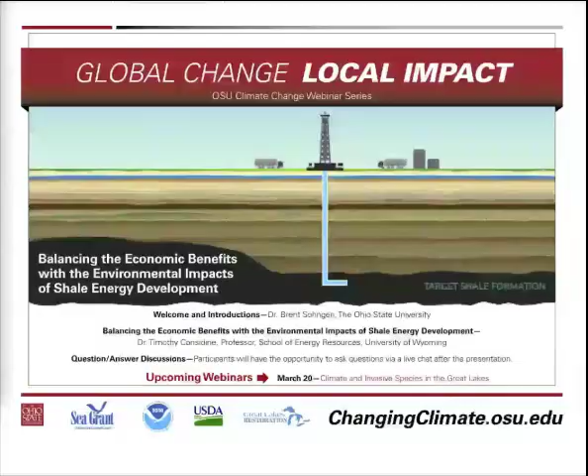So without further ado, let me introduce today's speaker. Dr. Timothy Considine is the School of Energy Resources Professor of Energy Economics at the University of Wyoming and Director of the Center for Energy Economics and Public Policy there. He was previously employed with the Pennsylvania State University, Bank of America, and the Congressional Budget Office. Dr. Considine holds a PhD from Cornell University, an MS from Purdue, and a BA from Loyola University of Chicago. We're delighted to have Dr. Considine with us today to speak about balancing the economic benefits and the environmental impacts of shale energy development. Dr. Considine?

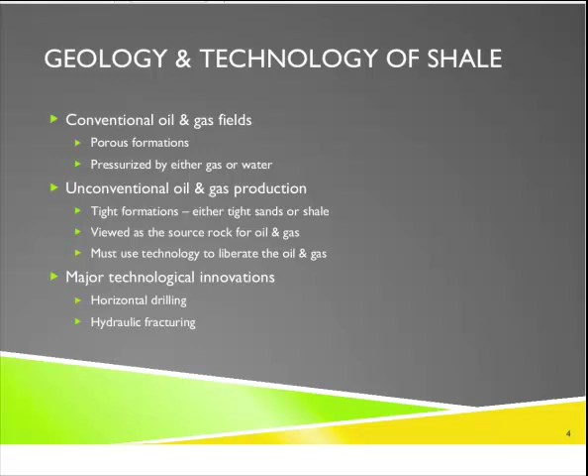So technology is the key here, and there have been a number of technological improvements over the past 10, 15 years that have really gained a foothold since 2004. And there are basically two: horizontal drilling and hydraulic fracturing. On the next slide is an illustration of what these technologies can do. You can see there are two wells.

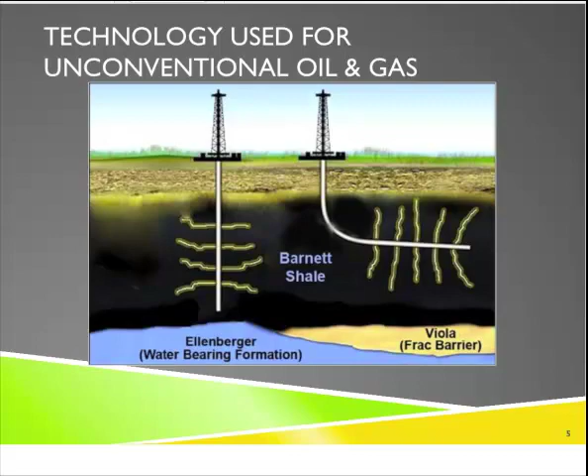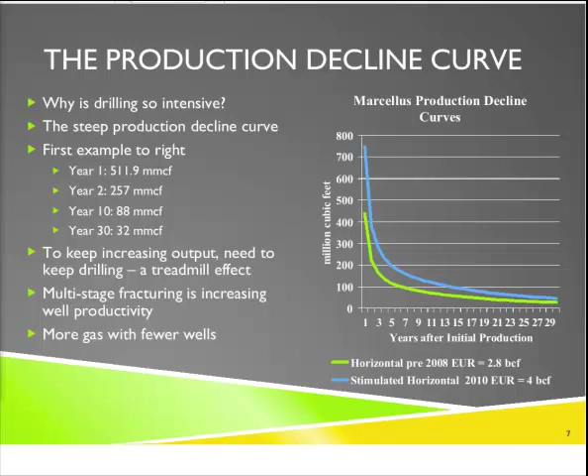So if a company or an industry slows down or reduces drilling, then those production decline curves will eventually catch up with you. Production will peak and start to decline. We're already seeing early evidence of this in the Barnett with the slowdown in drilling there. Okay.

For instance, in northeastern Pennsylvania, there are quite a few wells in that 4.6 BCF range and above. And as you move west and south, the wells get a bit smaller and the reserves aren't quite as large. I assumed 4% of the output is natural gas liquids. That's a critical assumption. That's based on some aggregate data we've collected.

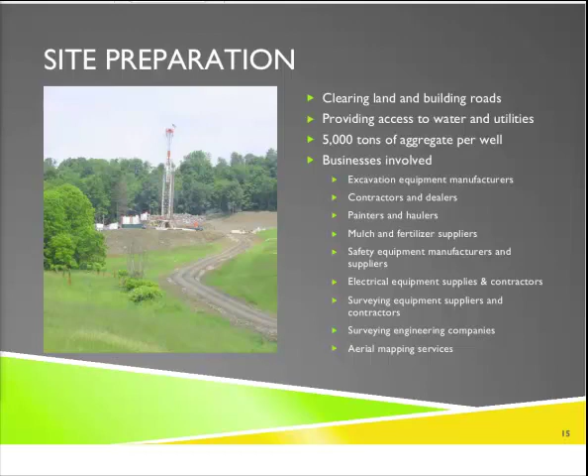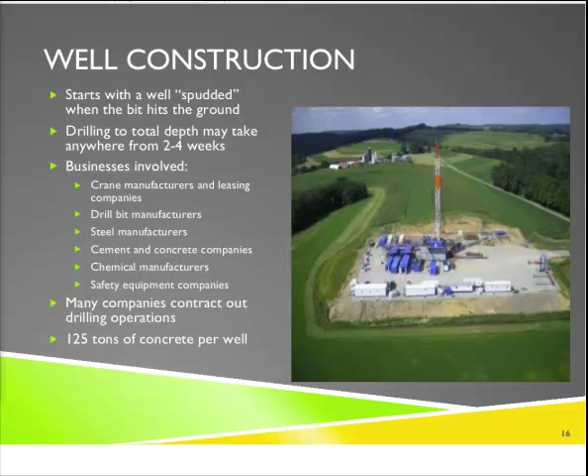Next is well construction, and the term in the industry is when a well is spudded. That's when the drill bit hits the ground, and most statistical agencies will then measure, okay, a well is started. This drilling can take anywhere from 2 to 4 weeks, and you can see the list of companies involved. One sector that sees a lot of business is, again, not only aggregates, but concrete producers. About 125 tons of concrete are used per well.

And then once the well is drilled, most wells are stimulated, and this is where hydraulic fracturing comes in. Notice in the picture there are a number of long vehicles. These are flatbed trailers that have diesel pumps on them, and a very significant amount of diesel fuel is consumed to run these pumps to pump the water into the ground for the hydraulic fracturing. Estimates vary. Anywhere from 5 to 8 million gallons of water are used to frack a well, and a considerable amount of sand and other materials are used during the fracturing process.

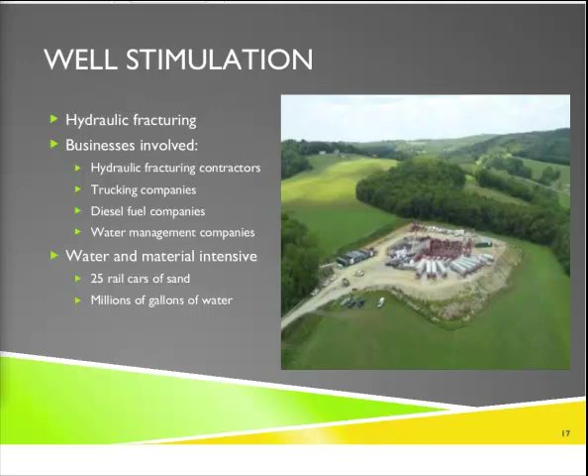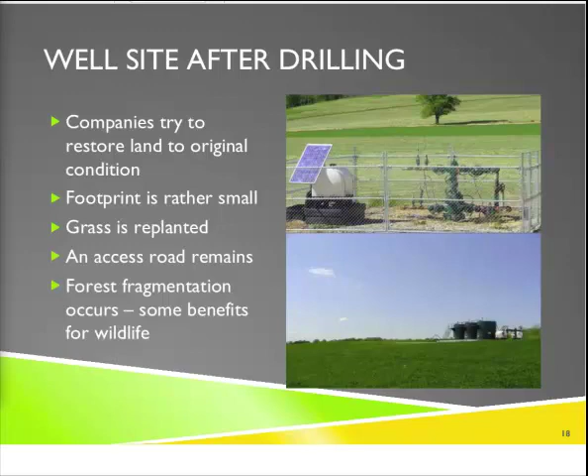Then finally, okay, so that completes the drilling process, but there's something called midstream development that occurs, and it varies by region and counties. Companies will try to set up an area like a good portion of a county or an entire county, and they may have hundreds of wells, and they're all connected in a network of gathering lines, and those gathering lines go to compressor stations. And those compressor stations raise the pressure of the gas so it can be pushed into interstate pipelines.

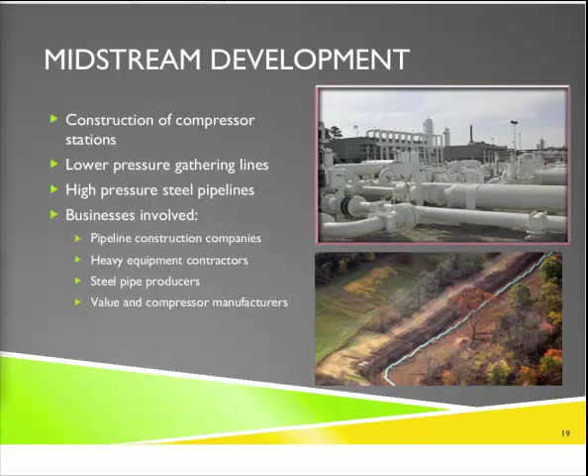So there's a great deal of investment that occurs in building out these gathering line networks and compressor stations. And then pictured down below is a medium-sized pipeline that may connect these compressor stations to the big interstate pipelines. So you can see that these types of facilities have a lot of pumps, steel, and this is why a lot of people expect that this development will be a big stimulus to the manufacturing sector.

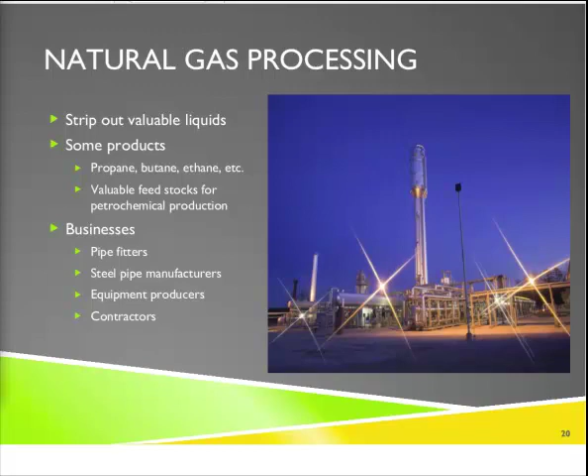Now, another key step, and this is real important for the emergence of the Utica in Ohio and the western Marcellus: the Marcellus and the Utica have a lot of wet gas production there. And what is wet gas? Well, wet gas comes out with not only methane, but propane, butane, and ethane, and these latter three products can be extracted in a natural gas processing facility that's pictured on the right, and then sold as petrochemical feedstocks. So in southwestern Pennsylvania, a number of these facilities have been built to process this Marcellus gas and provide these products to refineries and petrochemical facilities.

And then finally, and we've yet to see this in a big way, although it's starting in some areas, is the expansion of downstream industries that are based on natural gas. And there's a number of possible sectors. First of all, as I alluded to before, petrochemical manufacturing. Ethane is a feedstock for ethylene production, and ethylene is used to make feedstocks for plastic materials.

Another potential, very attractive industry is fertilizer production. Anhydrous ammonia production requires natural gas as a feedstock, and currently U.S. gas prices are quite low by world standards. The only lower gas price area is in the Middle East, and this makes it very attractive to relocate fertilizer production back in the United States.

There's also metals such as steel and glass industries that use heat for melting materials, and they would also benefit and perhaps expand production. There's been one announcement recently of a steel mill going into eastern Ohio to produce pipe for the drilling industry. Another big potential user of this natural gas is electric power generation, and here you could see quite a bit of switching from coal to natural gas.

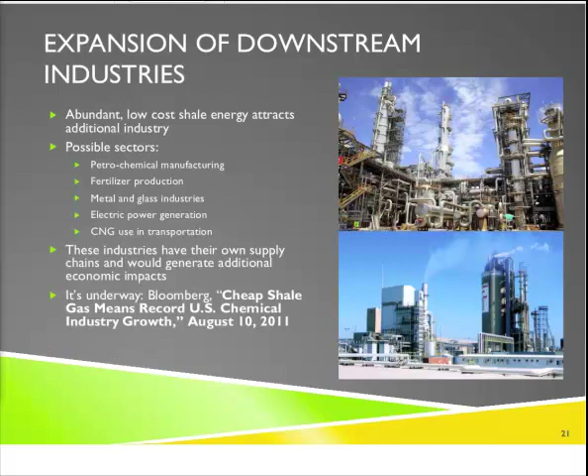And then finally, another application is compressed natural gas, CNG, in transportation. And it's likely that these applications would occur in high mileage, low fuel economy vehicles like sanitary trucks, city buses, truck fleets, and the like. And then one other sector that could be a market for this eastern gas is exports of natural gas in the form of liquefied natural gas. There are a number of groups that have efforts underway to export LNG out of the Gulf Coast. The point is, all of these downstream industries will take a while to take root and develop, several years.

Okay, let's take a quick look at some of the economic impacts. When I was just about finishing my time at Penn State, I was invited to do an economic impact of the Pennsylvania Marcellus, and we did that study. It was released in 2009. We've done a couple of others since then. We're currently involved in another study. And here we conduct surveys of spending by the industry and do a conventional economic impact analysis.

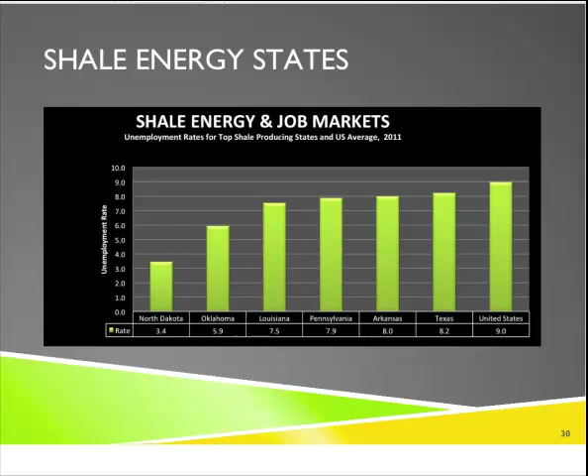Okay, now most of these economic impact numbers or estimates are model driven, and we've always been concerned about seeing if the evidence really tends to support this story, and the next section puts some slides forth that seem to suggest that in the states with significant shale development, for instance on slide 30, unemployment rates are a bit lower, in some cases much lower, as in the case of North Dakota, but a bit lower than the national average. And this seems to be borne out by taking a closer look within the state.

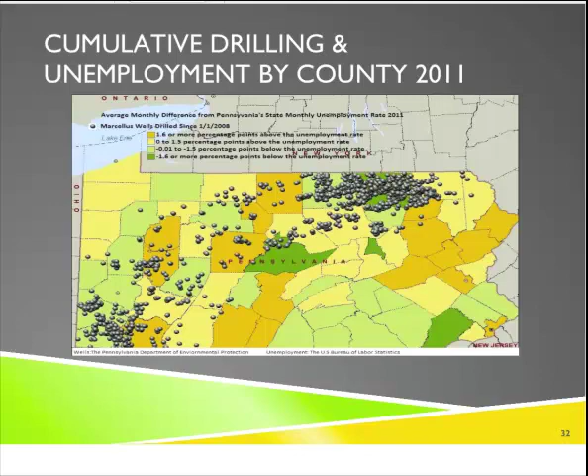This is another manifestation of this, the dots indicating where the wells are drilled, and the color coding indicating the deviations from the statewide average. The greener shades are for unemployment rates that are below the statewide average, and this again supports the story that there is some stimulus.

First, there are unavoidable impacts during drilling. As I alluded to before, the clearing of land for well pads and pipelines. There's also local congestion, noise, dust in rural communities. And there are also emissions during drilling. And a lot of these emissions are associated with the hydraulic fracturing, the consumption of diesel fuel.

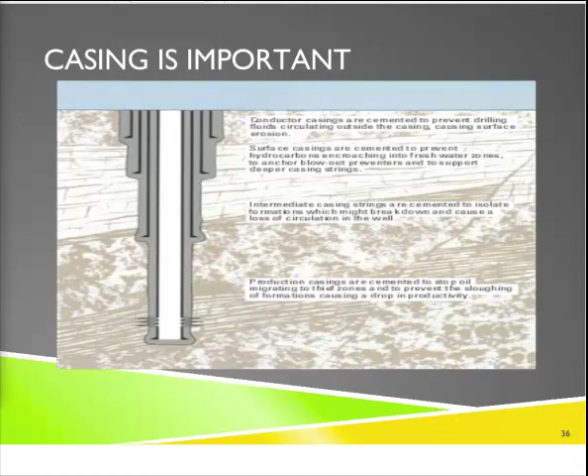Wells are sort of shaped like a telescope, and those layers on the side are steel pipe. And there have been 2 incidents in Pennsylvania where, due to improper formulation of cement and casing design, shallow gas has migrated into local water supplies. And this is a real concern.

Obviously, blowouts and venting and gas migration events are major events. And we took a closer look at actually what happened, what went wrong, how were the impacts mitigated. The vast majority of the environmental events were relatively minor, and didn't really involve substantial impacts on the environment. Many of these were quite small spills, and this leads us to conclude that most of the events are minor.

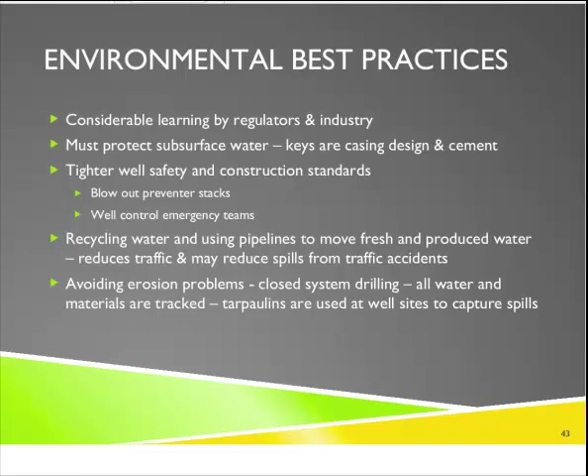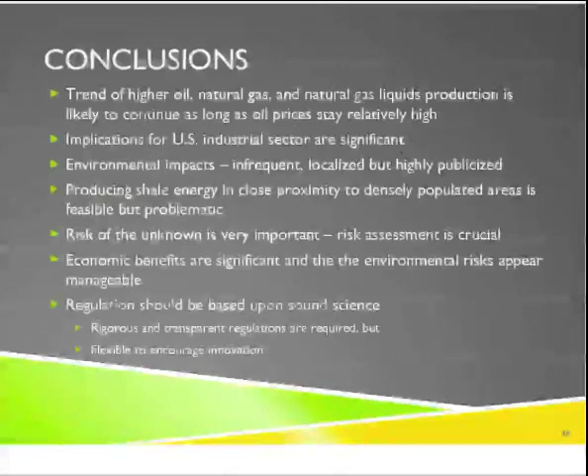Okay, so here we have, just to conclude, actually I'm finishing quicker than I anticipated. We have this trend for higher oil, natural gas, and natural gas liquids production, and this is likely to continue as long as oil prices stay relatively high. And the implications of low-cost natural gas for the next 10 years could be quite significant for the industrial sector. You could see a lot of downstream industrial development based on this abundant low-cost natural gas.

My reading of the environmental record is that the severe environmental impacts are relatively infrequent. The effects are fairly localized but highly publicized. Another observation here, and this is perhaps unique to the East, and this will be a challenge: producing shale energy in close proximity to densely populated areas is feasible but somewhat problematic. So as we go forward here, we're going to see this tension persist.